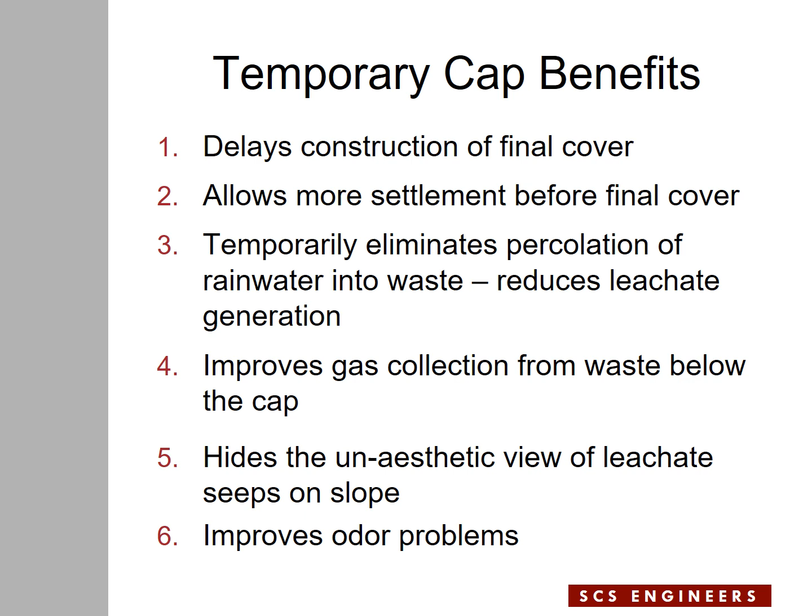There's some preparation that needs to be done as part of the construction of the cap. First, all large objects need to be removed from the slope. Large objects could be large gradation soils, stones, not boulders necessarily, but large pieces of rock that may impact the integrity of the geomembrane. Also, large vegetation needs to be removed before the geomembrane is installed. If the geomembrane thickness is in the order of 40 mil, fine vegetation can probably stay on the slope. It won't harm the geomembrane.

But if it is a thin geomembrane, like a 20 mil geomembrane, you may need to strip the slope of all vegetation and even put fine graded soil over the slope to protect the geomembrane against any damage.

If there are gas wells or gas pipes coming out of the slope, naturally we would have to install geomembrane boots at every penetration. This may also include other components such as condensate sumps or anything that may exist in the slope area. And after installation of the geomembrane, we have to provide ballasting to keep the geomembrane in place during high winds. Uplift is a big issue, so the ballasting needs to address the uplift.

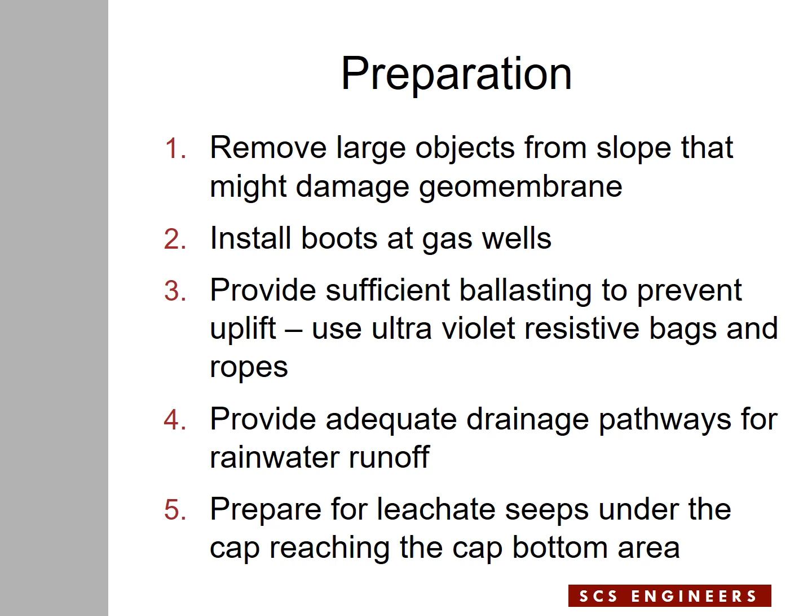There's maintenance involved with temporary caps. One of them is repair of geomembrane boots at penetration points, gas wells, any pipes that penetrate the geomembrane. Because this is an exposed geomembrane, you get expansion and contraction in the geomembrane, and the boots may get impacted as a result of this contraction and expansion. So damage may become visible at the boots that needs to be repaired.

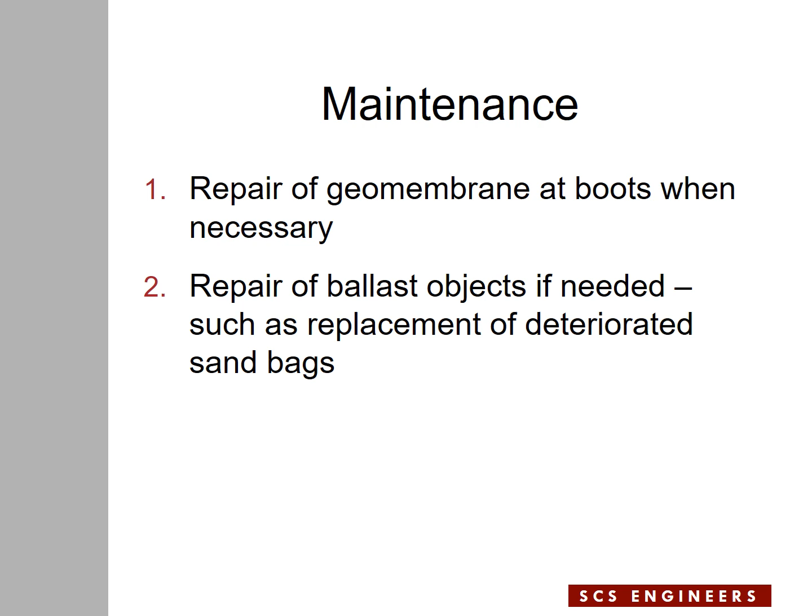Also, if the temporary cap stays in place for a long time, the integrity of sandbags or the ropes may get affected as a result of ultraviolet radiation, and at some point the elements need to be replaced.

When it comes to removal of the caps, the recommendation is to remove it in stages. Let's say you had a temporary cap over a temporary slope. The fill on the adjacent area is started, and the fill is going against the area where the temporary cap is in place. The recommendation is not to remove the entire temporary cap, but to remove it in stages to take benefit of the area that is still covered with temporary cap and doesn't need to be exposed for some time.

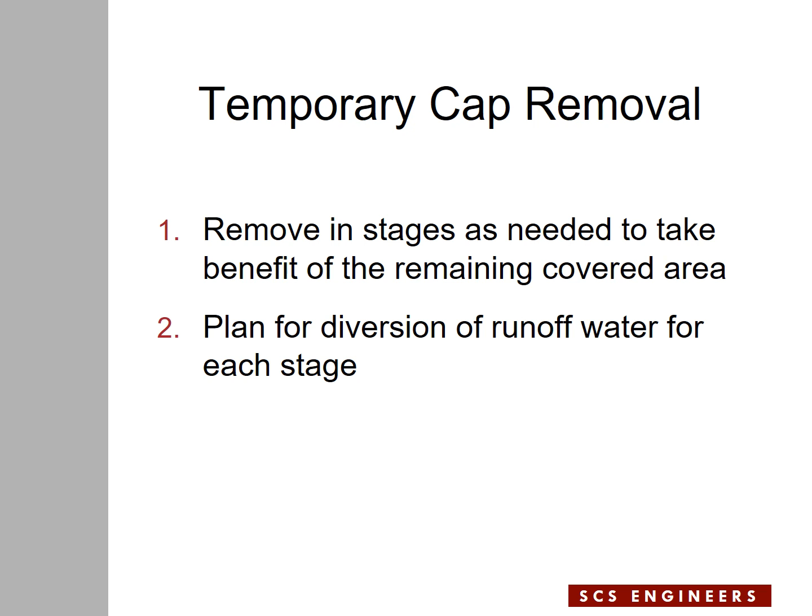In that case, it is highly recommended that you think ahead of time with respect to the diversion of runoff water as the result of changing the geometry of the temporary cap. The water runoff has to go somewhere. That needs to be thought of ahead of time.

I'm going to go through a number of pictures for two cases. These are temporary caps that were installed over the past recent years, and I want to share some pictures with you.

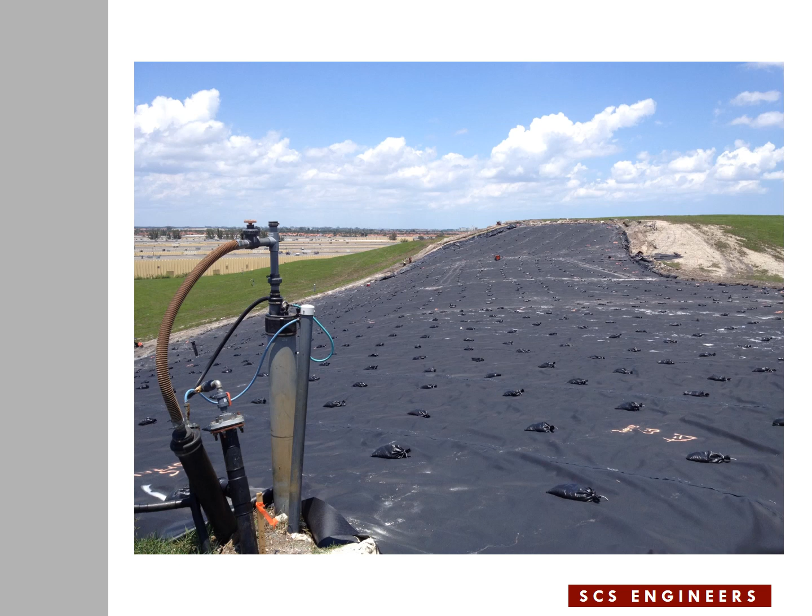The first one is a Subtitle D landfill in South Florida, and what you see in front of you is the temporary slope that additional fill will go against some years down the road. They wanted to protect this slope with a temporary cap to reduce leachate generation, to improve gas collection efficiency out of the slope, and also there were leachate seeps on the slope, so they wanted to improve the aesthetics of the slope. In this slide, the geomembrane is installed and sandbags are placed at 10-foot spacing. The ropes are not pulled yet, but it will be done at a later stage.

This is the larger view of the entire area. It's close to 20 acres of temporary cap. The anchor trench is shown in the middle of the slide at the top of the slope, and in the lined area, you see the penetration of gas wells, and there were condensate sumps. There are other pipes that were penetrating the geomembrane. There were many penetrations that they had to boot.

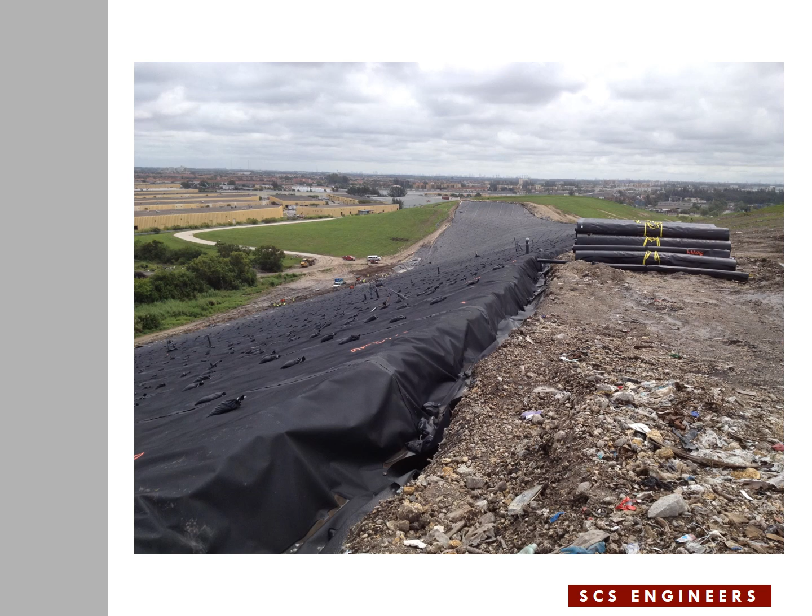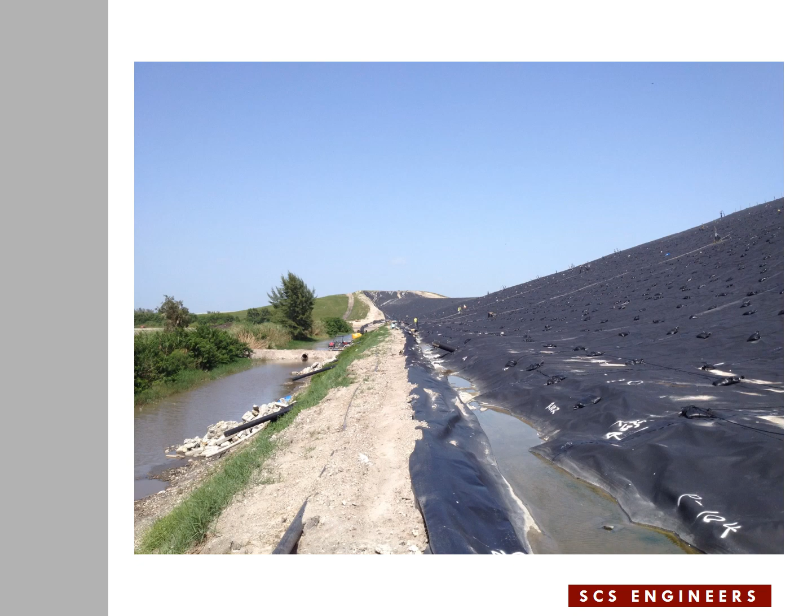This slide shows the drainage pathway near the bottom of the slope. It's a lined temporary ditch at the bottom of the slope. Runoff gets in this ditch and then goes at certain points through HDPE pipes through the body of the berm to the left side of the slide, which is the landfill's permanent drainage ditch. Two of the HDPE pipes draining the temporary ditch are visible, and they used riprap at the outlet of the pipes to prevent soil erosion at the point of discharge. This feature, the temporary ditch, is extremely important for temporary caps.

This is a view of the final product. The ropes are installed but are not visible in this picture. It's a fairly large area that was temporarily capped. Near the top of the slope on the profile of the landfill, you see some shaded vertical sticks. Those are 4x4 wood posts that were installed in the anchor trench of the temporary cap, and the ropes were tied to these wood posts to secure the ballasting system.

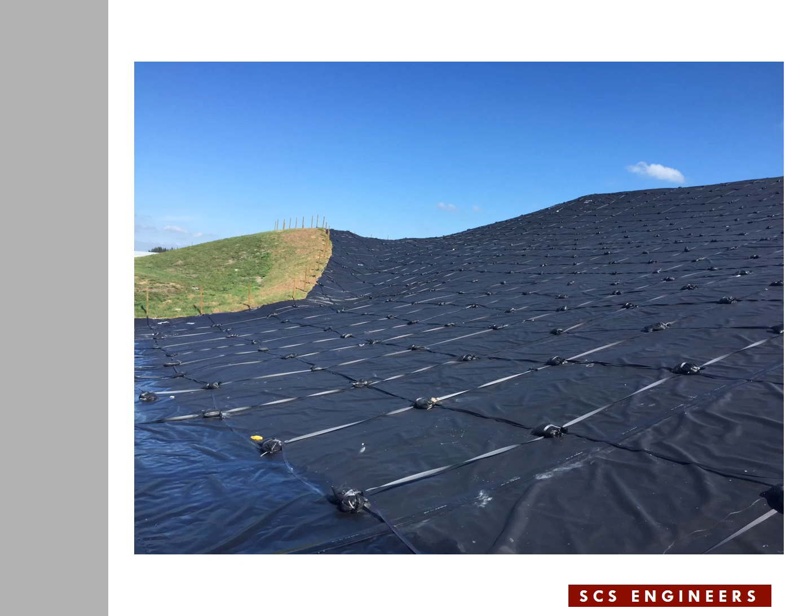There were two distinct areas included in this temporary cap. One area was below a road that I'm going to show you in a minute. It has reached the final grades, 3:1. They didn't want to install the final cover, but they wanted to temporarily cover it with a temporary cap. And above the road was a temporary slope where additional fill or additional ash was going to be placed over the temporary slope some years down the road, but they wanted to cover it temporarily with geomembrane. The purpose behind installing the temporary cap was to reduce leachate generation.

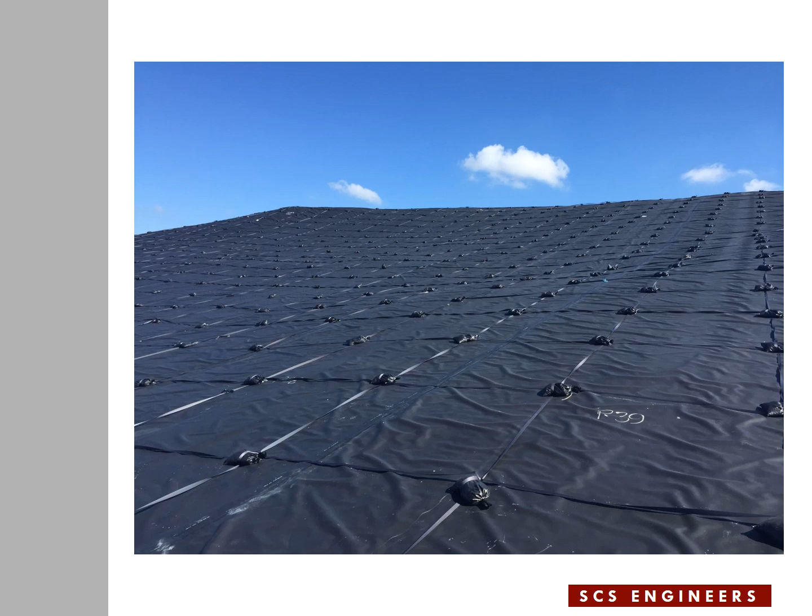This is a section of the slopes. It was a very clean job that the contractor did, and the rows of sandbags and the straps are very visible in this case. This is an area above the road that I'm going to show you in a minute. This is the temporary slope that additional fill is going to go against.

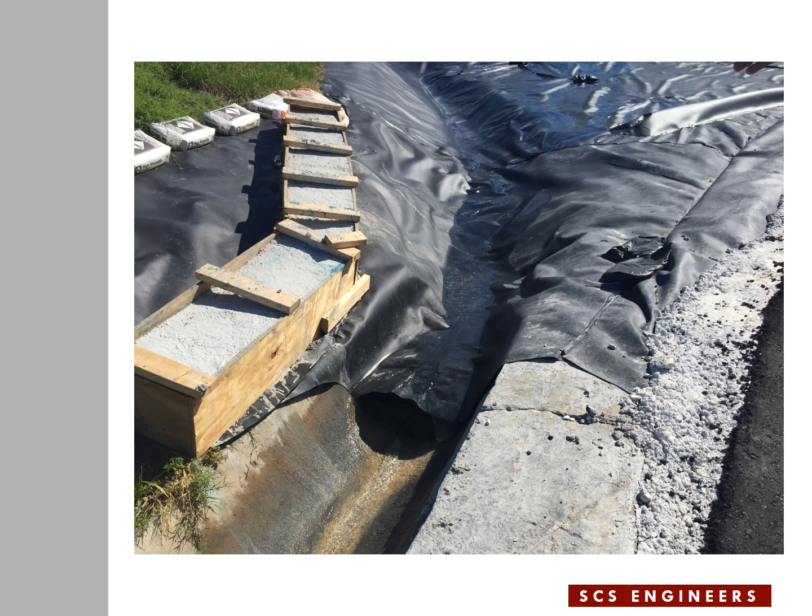At some points at the perimeter of the temporary cap, we provided a drainage pathway. You see here the lined ditch is part of that temporary pathway, leading to a permanent existing concrete-lined ditch next to an access road. So water off the temporary cap gets into the concrete ditch, goes to the bottom of the slope to the permanent drainage ditches around the landfill.

Here is the road that I mentioned earlier. The area to the right is the final 3-to-1 slope of the landfill that's temporarily covered. To the left side of the road is the temporary slope that additional fill will go over. The client wanted the final road constructed as part of this construction. So we provided all the geosynthetics that are needed as part of the final cover system below the road area before the base layer and sub-base layer were constructed, and finally they wanted the top surface to be paved.

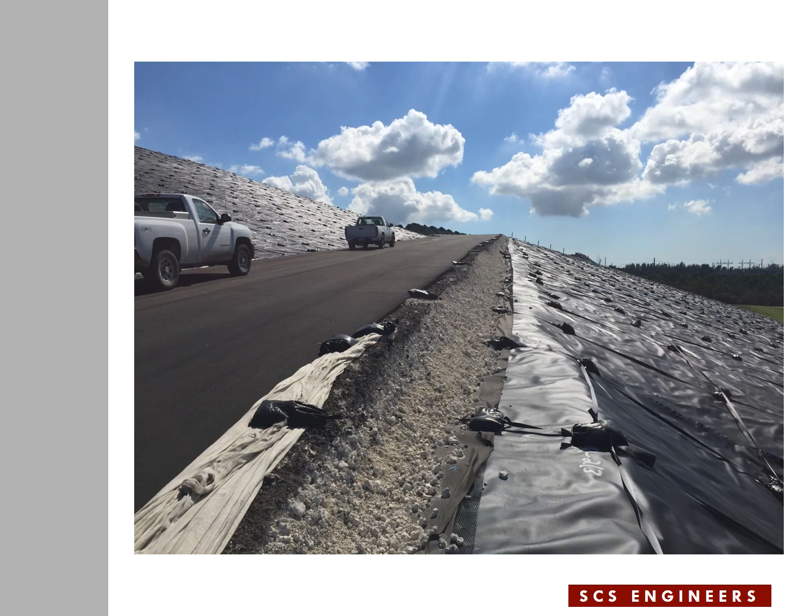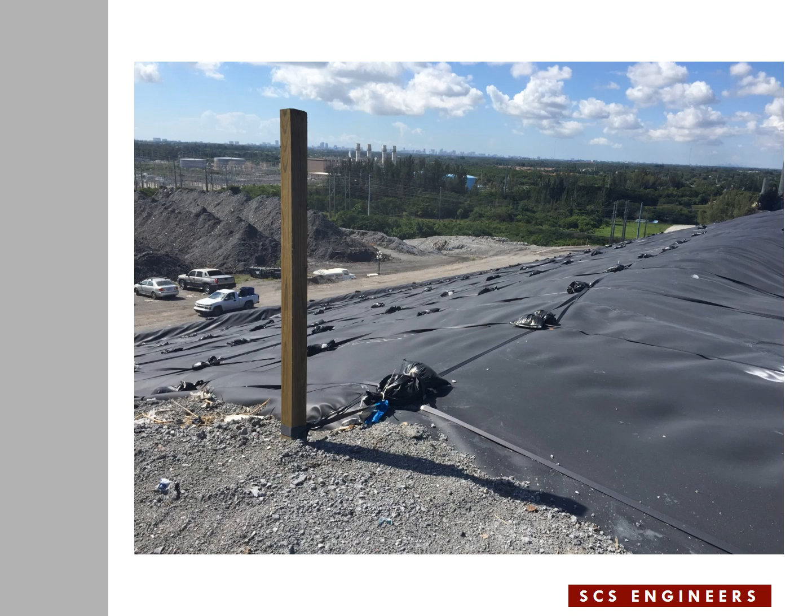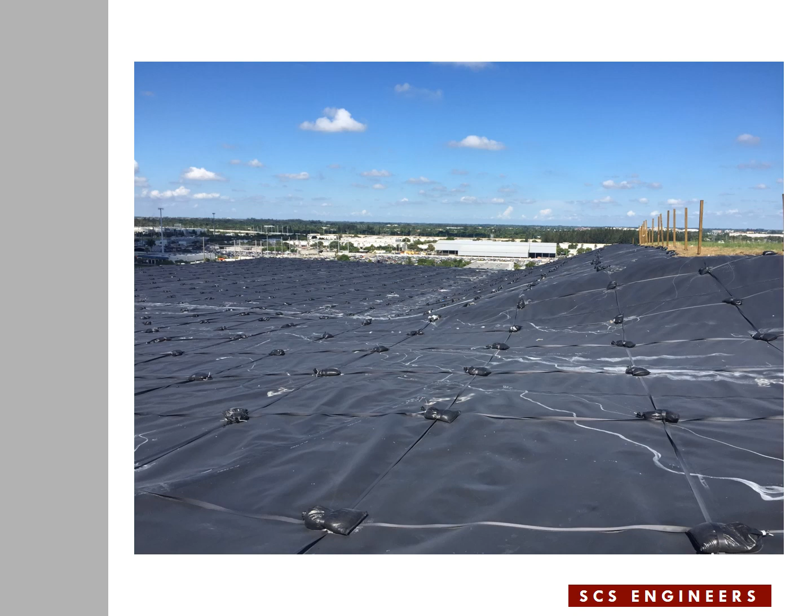Here it shows the wood posts, the 4x4s that go into the anchor trench, and the straps are tied to the wood posts in order to secure the ballasting system. Here is a view of the top area. Like I said, there was some grading involved in this project, so we graded this slope as part of the design and the earthwork in the field in order to get the runoff to the right areas that we wanted to get to. To the right side of the slope, the wood posts are visible at the anchor trench of the temporary cap.

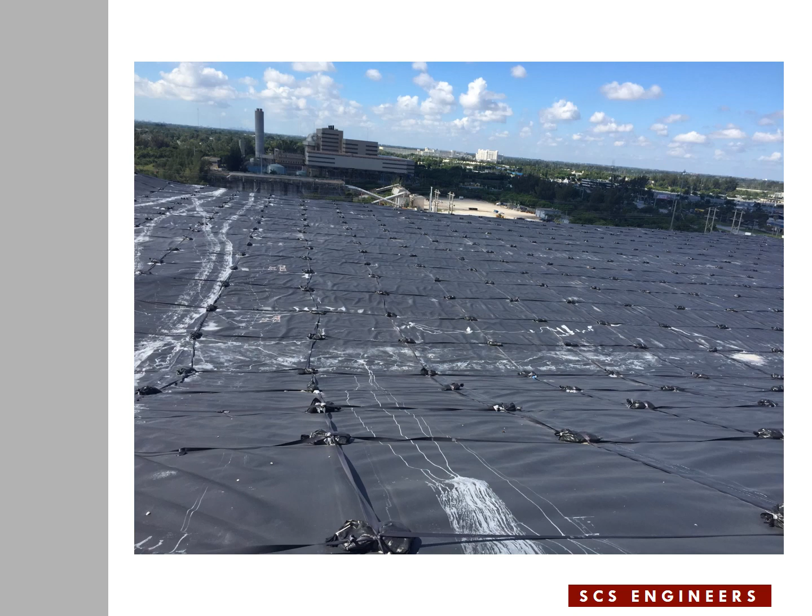This is standing at the top looking down. The slope in front of the slide is like a 3-to-1 slope looking down. In the middle of the slide is a flatter slope, but sloping to the right in order to get the runoff to the right side, to the south. We are looking south in this picture, and the incinerator is visible in the upper part of the slide.

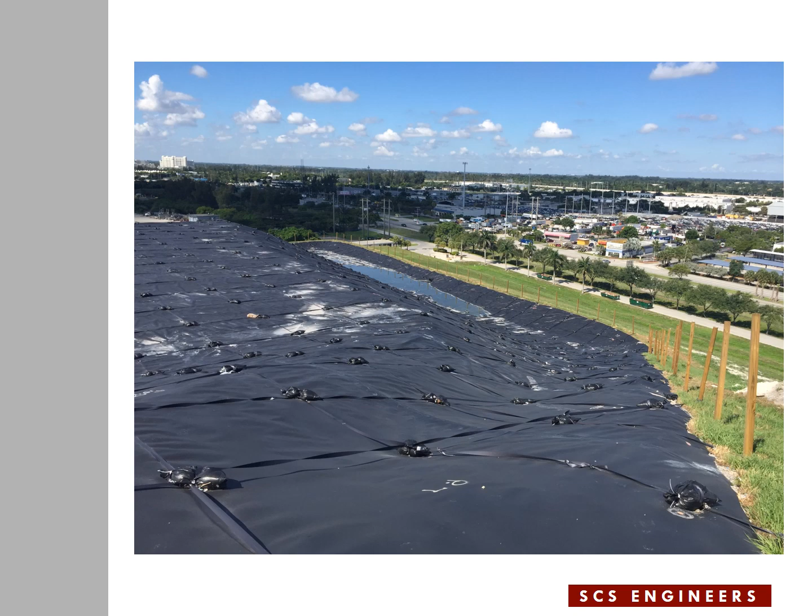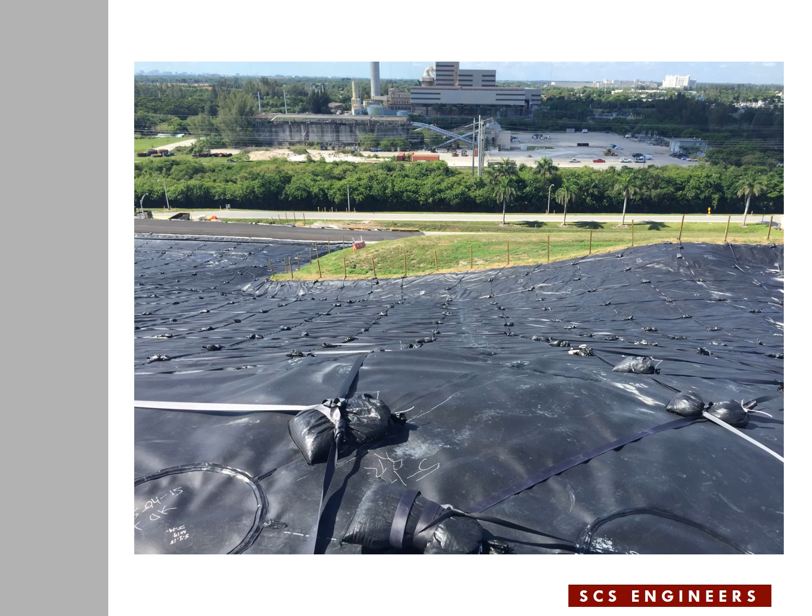This is looking south again, a temporary slope above the road that is visible in the middle of the slide. In areas where we couldn't have a temporary ditch, we provided a berm type of slope in order to keep the runoff water within the lined area, leading it to the discharge point.

Another view of the temporary slope above the road. The road is shown in the middle of the slide, and as you see, the runoff flows near the road and then goes to the right side, where there is a discharge point. We also lined the side slope of the road, visible in this slide, in order to protect the road structure against runoff coming down the slope and hitting that side slope of the road structure. So we wanted to secure that road structure as well.

This is the top area, another view of it. As you see, it is sloping toward the low point. We are looking east on this slope. I showed you another slide earlier that was taken from the upper part of the slope on the left side, looking south.